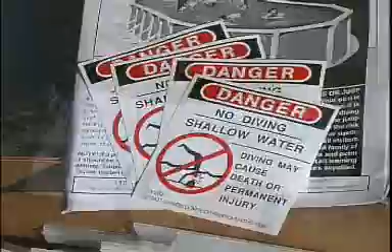Let's take a look at the assembly instructions. Each step is clearly shown and written in an easy-to-read manner for an easy installation. The packing list is a breakdown of all the parts for the pool contained in each carton. Parts are illustrated and identified by part number, description, and quantity for your pool.

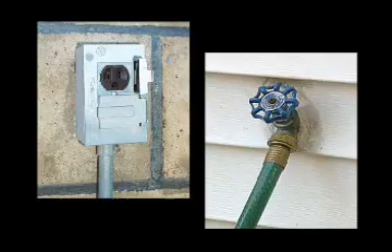Let's get started. First, select the proper pool location. Choose a location in your yard that best fits with your landscaping ideas, keeping in mind that the area should be level, firm, and away from trees and overhead wires. It should be convenient to an electrical outlet and water supply. Keep the pool away from existing structures such as your house, garage, or any other condition that might encourage diving. Remember, your pool is approximately 4 feet deep and is not designed for diving or jumping.

Check your local building codes when selecting your pool site. Do not install your pool over any septic tanks or any underground utilities. Here are some of the tools and materials that you will need.

Once you have read the instructions and selected the pool location, it is time to get a friend to help. The installation of an average-size pool normally requires 2 to 3 people.

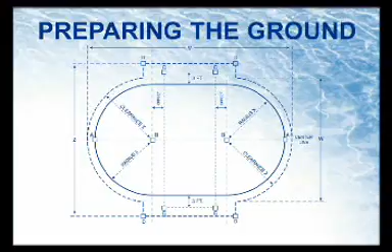Step 1. Preparing the ground. Mark the center line of the ground with string by driving the stake in the ground at one end of the pool location. Measure down the center line the entire length of the pool and drive another stake into the ground and tie a string from one end stake to the other. For identification, these 2 stakes are referred to as stake A.

Measure in from the 2 end stakes, 1/2 the pool width, and drive your 2 center stakes into the ground. These are referred to as stake B.

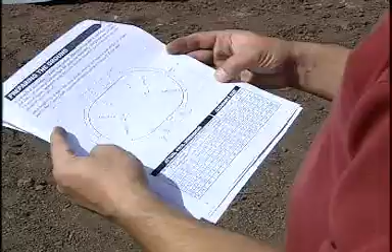Using the chart in the Preparing the Ground section of your instructions, measure in from each stake B the additional offset distance for your pool size. You may mark this spot. Mark the outside side of your pool by measuring out from the 2 offset points 1/2 the pool width plus 3 feet on each side.

Drive a stake on each side. These are referred to as stake C. This must be done at a 90-degree angle to the center line of the pool. To ensure your 90-degree angle, measure from stake A to stake C on both sides of the pool. These measurements should all be equal.

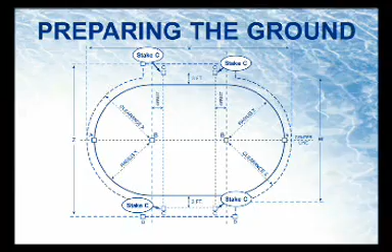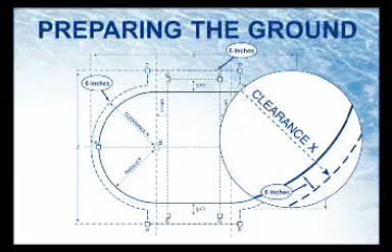This area is where the buttresses braces of the pool will lie. Compare all of the measurements from stake to stake with measurements in the instructions diagram. Measure out from the center stakes 1/2 the pool width plus 6 inches. Mark the outside of the area using chalk, flour, or spray paint.

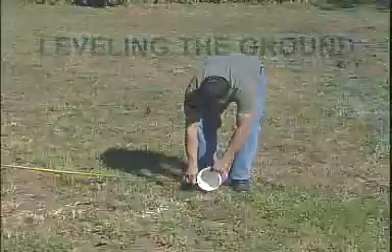Step 2. Leveling the ground. Using a shovel, remove all grass within the pool area. Nail the end of a 2x4 onto the center stake. The 2x4 should be long enough to extend from the center stake to the outside of the clearance radius.

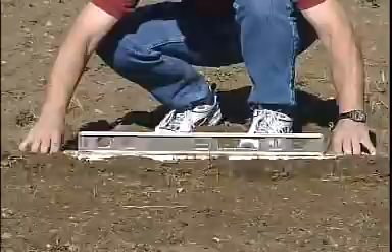And with the use of a level on top of the 2x4, work the 2x4 around the pool area in a circular manner, leveling the area as you go along. Repeat this process on the center stake. Do not fill in low areas. Dig away high areas for a solid, firm foundation. Pay special attention to the outer area as this is where the pool frame will rest. Rake the entire area, removing any sticks, stones, or debris.

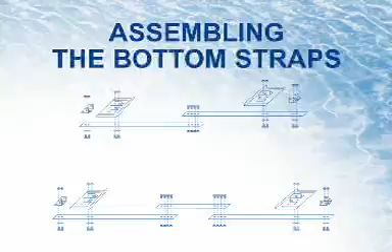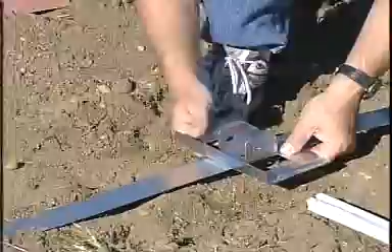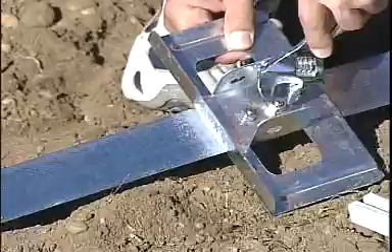Step 3. Assembling the bottom straps. Assemble the bottom straps together with the hardware provided. Make sure to insert the hex head bolt from the top, leaving the nut and exposed ends of the bolt thread on the bottom of the strap. Bolt on buttress bottom plate and the buttress brace bracket onto the ends of the bottom strap, this time inserting the bolts in from the bottom so that the plates will lay flat onto the patio blocks that will be installed later.

Step 4. Bottom rail and strap layout.

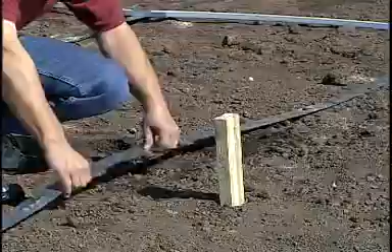Lay out the strap assemblies across the width of your pool. The first strap should start on top of the offset line from C to C. The measurement from one strap to another must be 48 inches.

Drive a stake in on the edge of the straps to prevent them from moving. Using another stake and a string, make sure that the ends of the straps are even and straight.

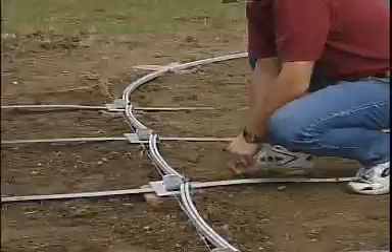Form the two end semicircles by sliding the long bottom rail groove facing up into the bottom plates. Leave a 1/16 inch distance between the end of the rail and the rail stop in the bottom plate.

Install the short bottom rails groove up on the straight side of the pool. Install the transition rails at the 4 points connecting the straight side rails to the round rails.

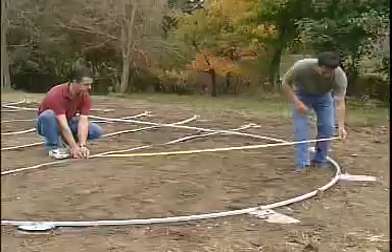Measure out from the center stake to each plate, making sure that all measurements are equal. Stake the outside of the ring to prevent it from moving while assembling the pool.

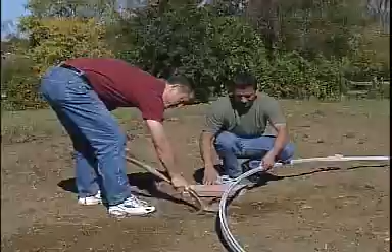Install patio blocks under each bottom plate and the outside ends of the strap assembly. Mark the location of each plate and install a patio block by digging down so that the top of the patio block is at ground level.

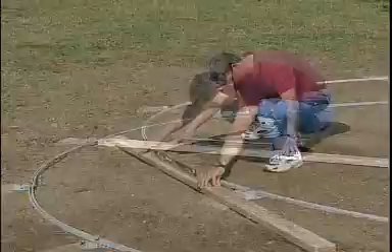Check the levelness by using the 2x4 from the center stake to each patio block, and from block to block. Bring the required amount of pre-washed sand or sifted earth inside the pool area at this time. Do not damage the bottom rail assembly.

Step 5. Insert the wall into the bottom rail. Do not attempt to install the wall on a windy day. Unbox the wall on a 4x4 piece of plywood.

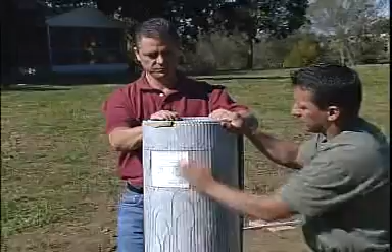Determine the location of your filter, as the filter inlet and outlet holes are at the beginning of the wall. Note the 'This End Up' label on the wall. At the top is where the filter inlet and outlet holes are scored.

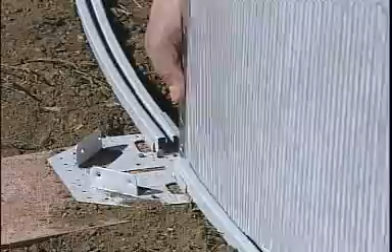Start inserting the wall into the bottom rail in the center of a bottom plate. Continue inserting the wall into the bottom rails all the way around the pool until the wall ends meet.

If the wall ends don't meet, don't panic. Simply readjust the rails, spacing evenly in each of the bottom plates, and align the wall ends. A screwdriver can be used to help align the wall ends.

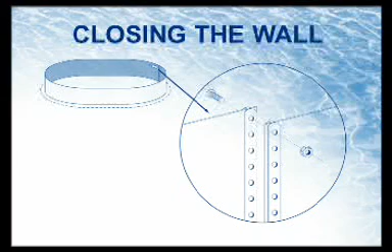Step 6. Closing the wall. There are 2 types of wall closure systems: the 4-bar wall closure system and the recessed posi-lock system.

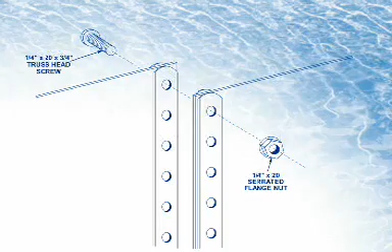If your pool wall has the 4-closure bar system, follow these steps. Secure the wall ends together simply by inserting the truss head screws from inside the pool through the holes in both ends of the wall and securing with the serrated flange nut on the outside of the pool. Make sure that all the holes have a screw and nut.

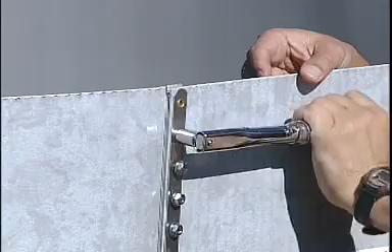Tighten each bolt to 85 inch-pounds. If no torque wrench is available, tighten each nut until snug, then tighten an additional half turn. Over-tightening the nuts could fracture the bolt and could also result in pool failure.

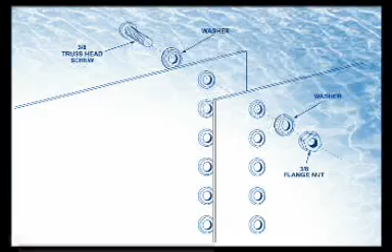If your pool wall has the recessed posi-lock system, follow these steps. Align the recess of the washers with the recess of the wall. One washer is used inside the pool and one on the outside.

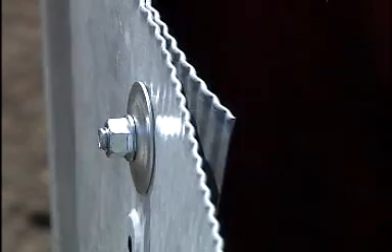Secure the wall ends together simply by inserting the truss head screws from inside of the pool through the inside washers, the holes in both ends of the wall, and the outside washers. Secure with the flange nut on the outside of the pool. Make sure that all the holes have a screw, washers, and nut and are tightly secure.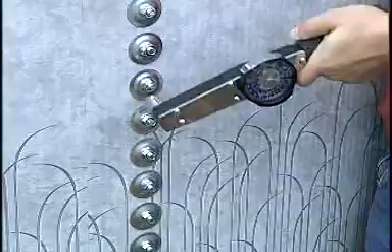Tighten each bolt to 85 inch-pounds. If no torque wrench is available, tighten each nut until snug, then tighten an additional half turn. Over-tightening the nuts could fracture the bolt and could also result in pool failure.

Step 7. Protect your liner. Once the wall is closed and the screws and nuts are tightened securely, cover the screw heads on the inside of the pool with duct tape from the top of the wall to the bottom.

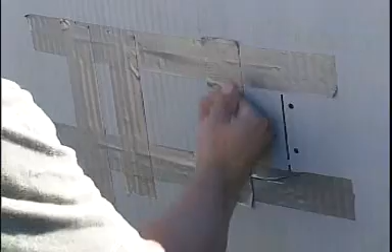If the cutouts for the through-the-wall filter inlet and outlet are not going to be used, tape over the pre-scored area on the inside of the pool. Assemble buttresses.

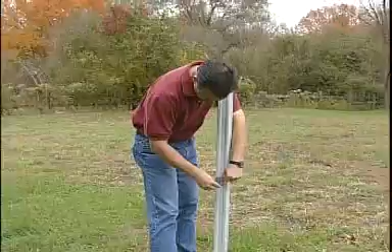Pre-assemble the buttress brace brackets to the buttress post. Attach the buttress post to the buttress bottom plate and secure tightly.

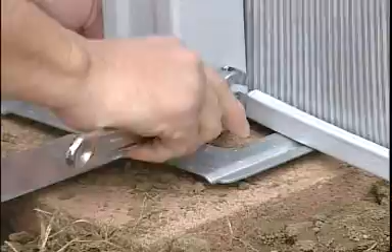Assemble the buttress brace to the bracket on the outside end of the strap and the bracket assembled to the buttress post. Tighten all hardware securely.

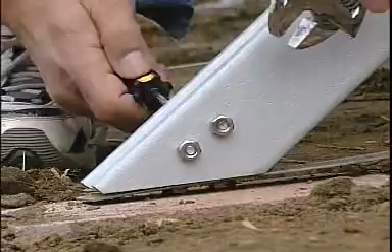It is best to install the buttress top plate to the buttress post using one screw at this time to support the wall. Step 9. Recheck your work.

Check your measurements by remeasuring from the center of the two center stakes around the semicircle ends, and check that all measurements are equal. Check again that the side of the pool is straight and that the measurement from strap to strap is 48 inches.

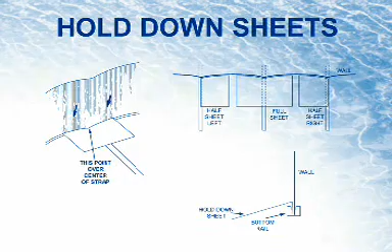Step 10. Hold-down sheets. Install the hold-down sheets on the inside of the pool along the straight side.

Simply press the lip edge of the sheet into the bottom rail in the same manner as you installed the wall. There should be an approximate space of 12 inches between each hold-down sheet. This will prevent the straight sides of your pool from lifting up.

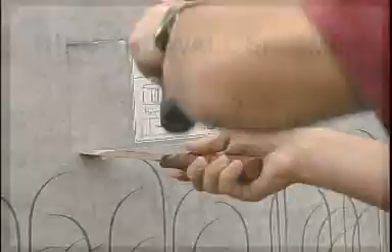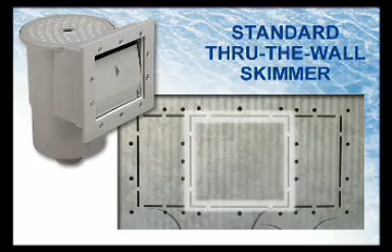Through-wall skimmer: if the through-the-wall skimmer inlet and outlet holes are to be used, simply break the perforations using a knife and a hammer. If you have the standard through-the-wall skimmer, cut only the inside square area of the perforations. If you have the wide-mouth through-the-wall skimmer, cut the entire area.

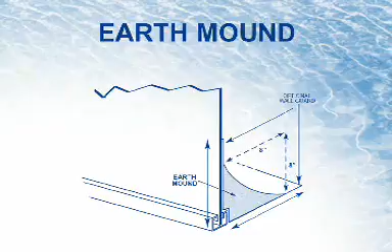Earth mound: using pre-washed sand or sifted earth, cover all strap assemblies and hold-down sheets. Build the earth mound around the inside base of the pool wall. Shape the mound to reach 8 inches up the wall and 8 inches towards the center of the pool. Evenly spread the remaining sand or earth around the pool floor to eliminate peaks or valleys in the base. Dampen the sand with a hose to prevent it from moving while installing the liner.

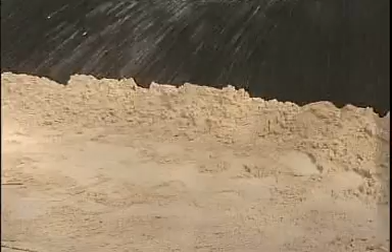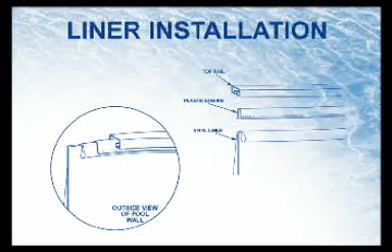There are several types of liners available, two of which are the standard overhang liner and the easy hook, or J-hook, liner. Make sure which type of liner came with your pool and follow the appropriate instructions.

Select a site near the pool with enough room to lay out and open up the liner. Inspect the area and remove any sharp objects that may cut or damage the liner. Unbox and unfold the liner to its full open position.

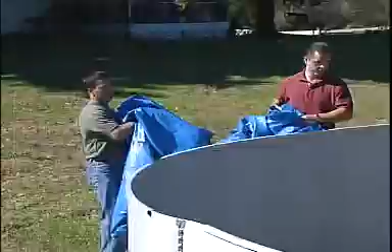Locate the center of the liner and refold the two halves to meet at the center. Fold up the liner along the center to allow you to carry it into the pool, keeping the two ends along the center exposed. Place the liner into the pool, keeping hold of the two ends, and pull them to the opposite ends of the pool at the center.

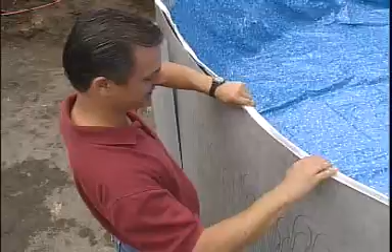If you have a standard overhang liner, overlap the liner over the wall and temporarily secure it using the plastic edging. If you have an easy hook or J-hook liner, place the hook part onto the top of the wall around the entire pool. Temporarily place a few of the top rails over the liner and wall for support.

Use a soft broom to stretch out the bottom and make sure the liner seam is resting totally on the earth mound and not suspended in the air. Continue this way all around the pool until the liner has fully opened up and you are sure it is resting on the bottom, not suspended.

Wrinkling of the liner may be evident. This in no manner reduces its structural strength. The more you work with the broom on the bottom, the more wrinkles will come out.

You can now start filling your pool with water. As the pool is filling, you may keep working on the liner to remove as many wrinkles as possible. Do not forcefully pull the liner once the water has started to be let in, as this may damage it.

Excess liner material on the outside of the pool may be double folded at this time by folding the excess material between the wall and the liner, or it can be rolled up once the pool is finished. Step 14: Pre-assembly of the top plates.

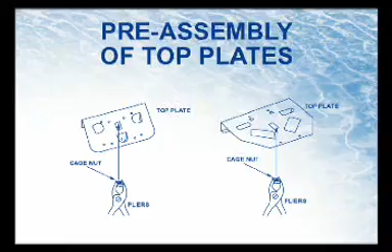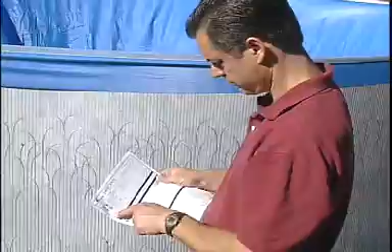Before the top plates can be installed, it might be necessary to install the cage nuts in the appropriate location. Please check your packing list to see if your pool requires cage nuts. Using pliers, simply squeeze together the spring sides of the cage nut and insert the nut into the slot of the top plate from underneath.

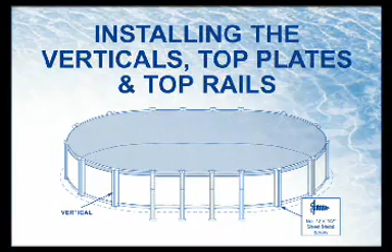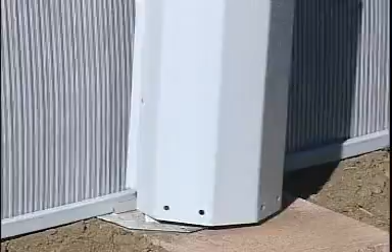Step 15: Installing the verticals, top plates, and top rails. If your pool has the two-piece resin vertical, insert the flat piece into the vertical before installation. Install the verticals to the bottom plates using the sheet metal screws. Make sure the 2 holes in the face of the vertical are on top.

Insert a top rail into the top plate up to the stop. Align the top plate over a vertical and press the top rail down over the plastic edging. Continue this way all around the pool, and secure the top plates to the verticals using the sheet metal screws.

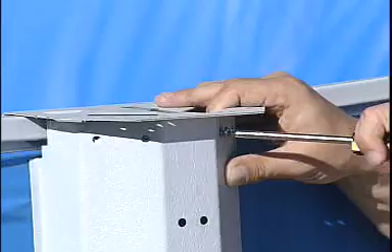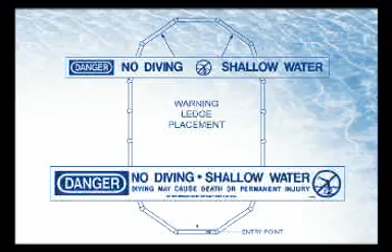Step 16: Install top ledges. Take note of the 3 warning ledges. The one ledge with the large warning on top is to be installed by the entry point of the pool. The other 2 ledges, with the warning on the inside lip of the ledge, are to be installed opposite the entry point, with the warning facing the entry point. This provides the maximum amount of warning where people enter the pool. Do not obstruct or remove these warnings.

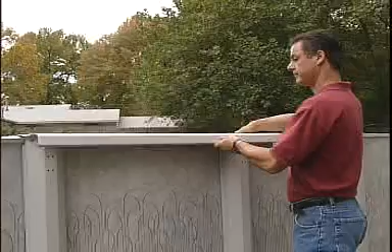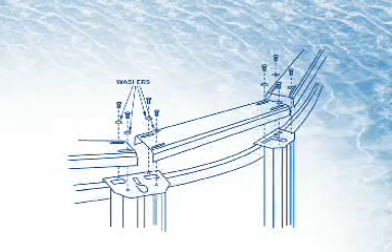Place the ledges over the wall with the 2 ends resting on a top plate. Refer to your instructions to find out which holes in the top plate you should start with; it may be necessary to use a different set of holes than those shown. If your pool has the extruded resin ledges, you must use the stainless steel washers with each sheet metal screw to secure the top ledges into the top plates.

Align the holes in the top plate with the holes in the ledge and insert a screw through the top ledge into the plate. Leave all the screws loose until all the ledges have been installed and the pool filled with water. This allows for any adjustments you might have to make while installing the remaining ledges, and also allows the pool to form its true shape.

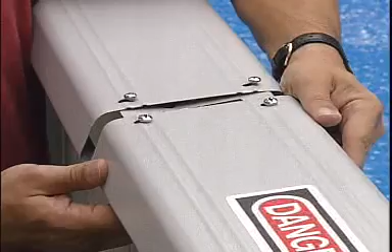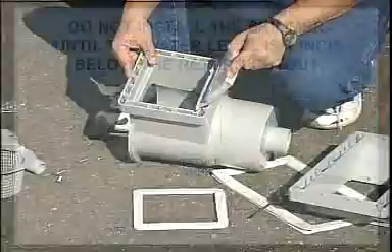You should not install the skimmer until the water level is 1 inch below the return cutout. Assemble all the parts of your skimmer following the manufacturer instructions. If you are using the skimmer with 2 standard gaskets, follow the next steps.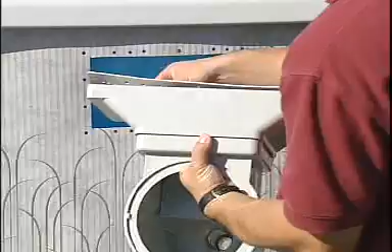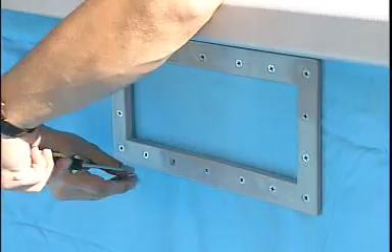Starting from the outside of the pool, position the skimmer and 1 gasket onto the skimmer cutout. From inside the pool, align the gasket and skimmer faceplate with the skimmer and secure with the screws supplied. Using a knife, cut the vinyl liner inside the skimmer mouth.

From outside of the pool, carefully cut a round hole in the liner for the through-the-wall return fitting. Using gaskets provided, 1 gasket inside the pool and 1 gasket outside the pool, insert return fitting in opening and tighten securely with a wrench to prevent leakage.

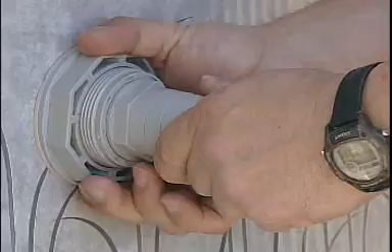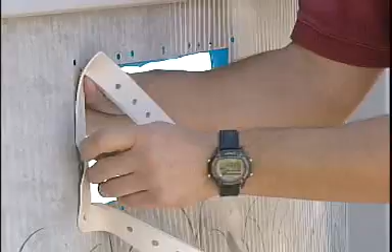If you are using the Wall Saver skimmer gasket, using a knife, cut the vinyl liner in the necessary position around the skimmer wall punch. Spread open the Wall Saver skimmer gasket and install over the wall and liner.

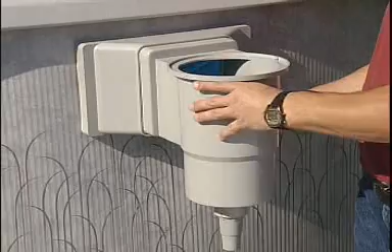Starting from the outside of the pool, position the skimmer onto the skimmer cutout. From inside the pool, align the skimmer faceplate with the skimmer and secure with the screws supplied. For the installation of the return fitting, follow the steps shown before.

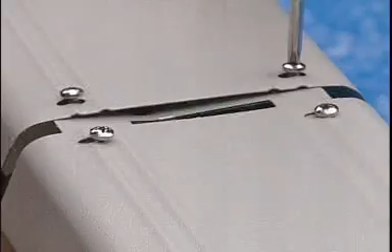For best skimmer action, water surface should be 3 inches above bottom opening of the skimmer. Once the pool has been filled with water, tighten all the ledge screws securely. Step 17: Install the top covers.

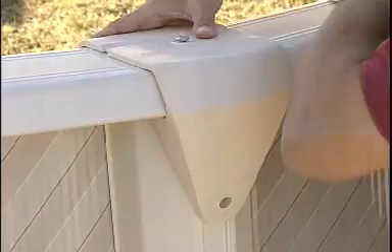To install the deluxe full contoured covers, simply place the inside and outside cover over the ledge joint. Align the hole in the covers with the cage nut in the top plate. Secure the cover using the stainless steel hardware on the top, and lock the frame together by attaching the cover

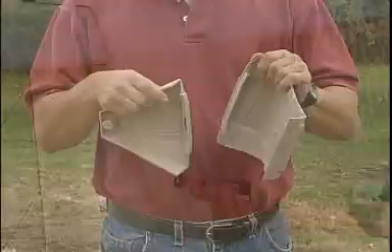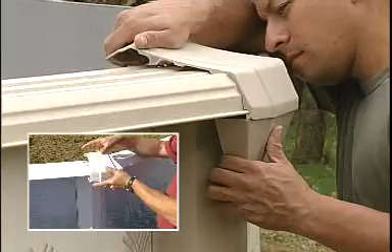to the vertical using the sheet metal screws. To install the 6 or 7 inch deluxe top covers, insert the bottom section into the top so that it becomes one unit. Then snap cover into place, aligning tab on bottom of the cover with slot in the top plate of the pool, and secure using the sheet metal screws.

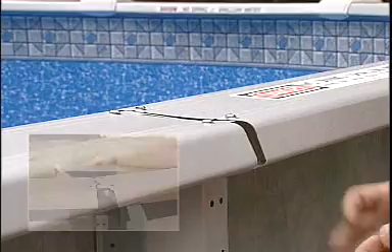To install the 2-piece wraparound cover, slide the inside cover into position and align the hole in the inside cover with the cage nut attached to the top plate.

Secure the inside cover using the stainless steel hardware. Slide the outside cover onto the inside cover, making sure the inside cover is in the slot of the outside cover.

Align the holes on the side of the bottom wrap with the holes on the top of the vertical and secure using the sheet metal screws.

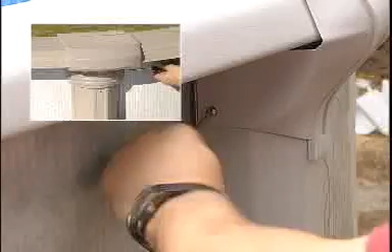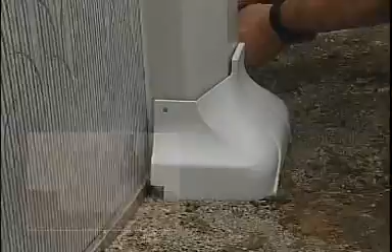Place the bottom pedestal onto the bottom of the vertical and align the holes on the side with the holes on the bottom of the vertical. Secure using the sheet metal screws.

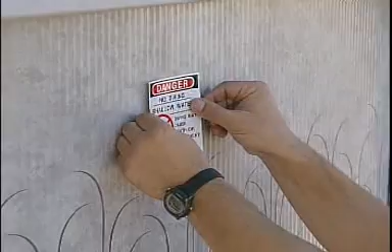Step 18: Warning labels. 4 additional warning labels have been supplied with your pool. Apply the self-adhesive labels to the pool or pool area where they are visible to all persons using the pool.

Congratulations! You have just completed installing your pool. Take some time out now to fill out your warranty registration card and mail it to us.

A list of emergency phone numbers should be kept on hand at the closest phone to the pool location. You should have numbers for the nearest police, fire and rescue departments, the nearest physician, the nearest ambulance service, and the nearest hospital. Keep life-saving equipment on hand at the pool location at all times.

Standard equipment should be a light but strong pole, not less than 12 feet long, with blunt ends, and a 1/4 inch diameter throwing rope as long as 1.5 times the maximum width of the pool, attached to a ring buoy with an outside diameter of 15 inches.

Common sense and safety precautions can prevent accidents and serious injury. You, as the pool owner, are responsible for the safety of all pool users. Some safety tips, rules, and regulations are: do not dive or jump into the pool.

Always supervise children. Never swim alone. Never leave your pool open and unattended. Remove ladder and use a safety fence or a safety cover to secure your pool.